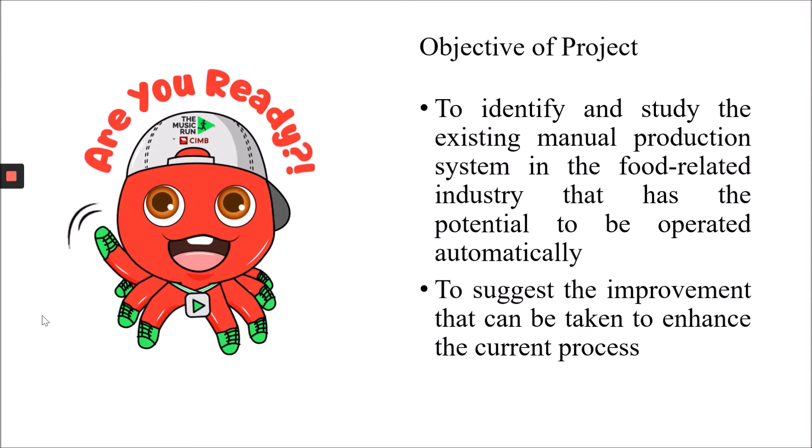First, let me talk a bit about what is automation. Automation is actually a process of automatically producing goods through the use of robots, control systems, and other appliances, with minimal direct human operation.

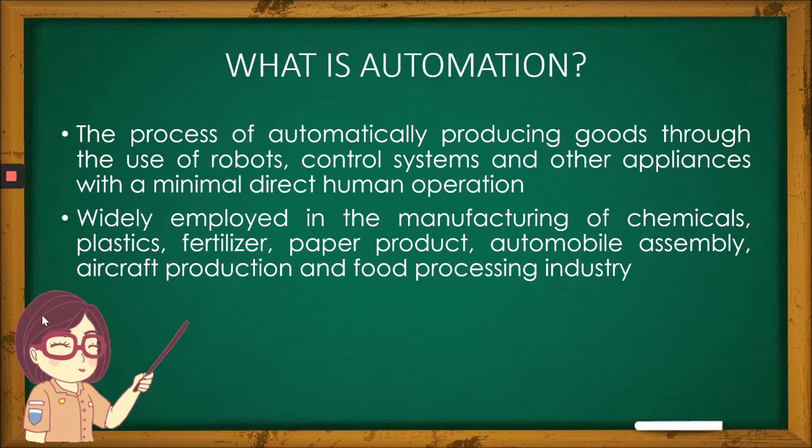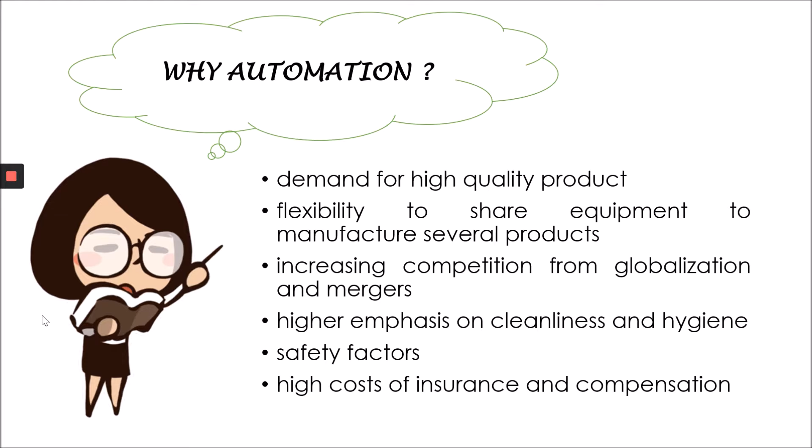It has been widely employed in the manufacture of chemicals, plastic, fertilizer, paper product, automobile assembly, aircraft production, and also food processing industry. Why do we need automation? Because there's a high demand for quality product, flexibility to share equipment to manufacture several products, increasing competition, high emphasis on cleanliness and hygiene, and also safety factors.

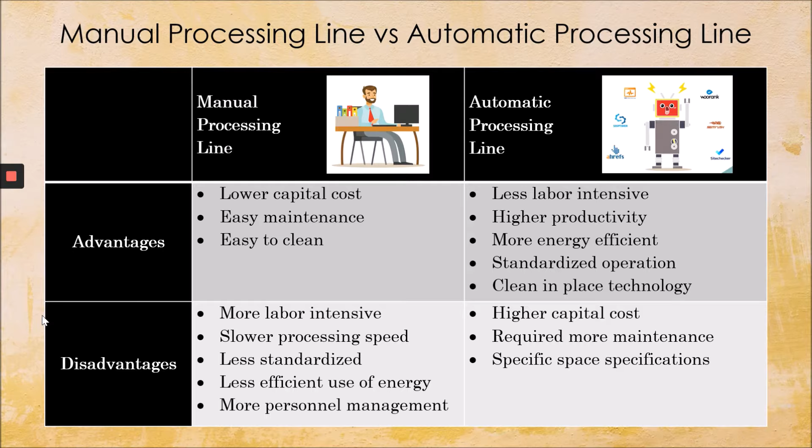The comparison between manual processing line and automatic processing line can be shown in this table, where manual processing line requires lower capital cost and is easy to maintain and clean. However, it requires more labor, and the processing speed is considerably slower and less standardized, while automatic processing line requires less labor, provides high productivity, is more efficient, more energy efficient, and standardized operations.

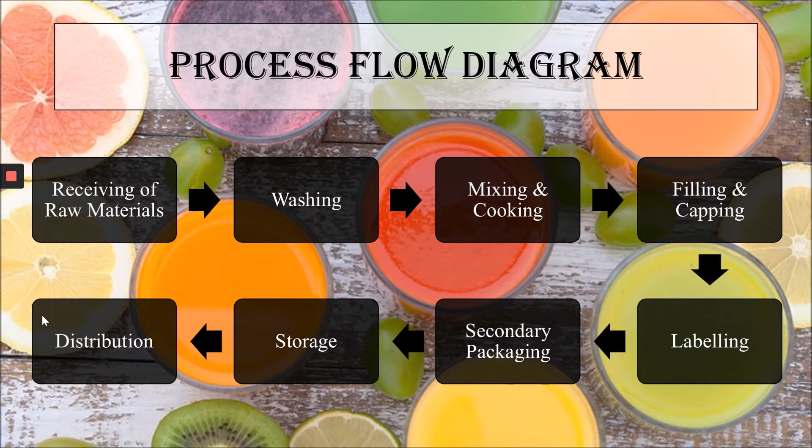Let us start with the house of quality first. House of quality is actually defined as a product planning matrix used to show how customer requirement is related to the method to achieve the requirement.

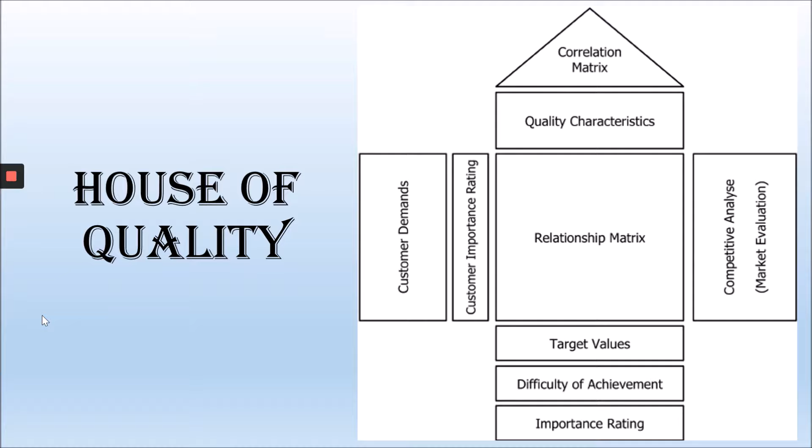In this house of quality, it consists of customer demand, quality characteristic, relationship matrix, correlation matrix, competitive analysis, and also the design targets.

In our proposed house of quality, there are six main customer demands, which are high quality product, reasonable price, variety of product choices, product appearance, tasty and nutritious product, and also long shelf life and shelf stable product.

The quality characteristics include production cost, flexibility of machine, reliability of machine, quality control, formulation or recipe of product, cooking technology, and also availability of raw material.

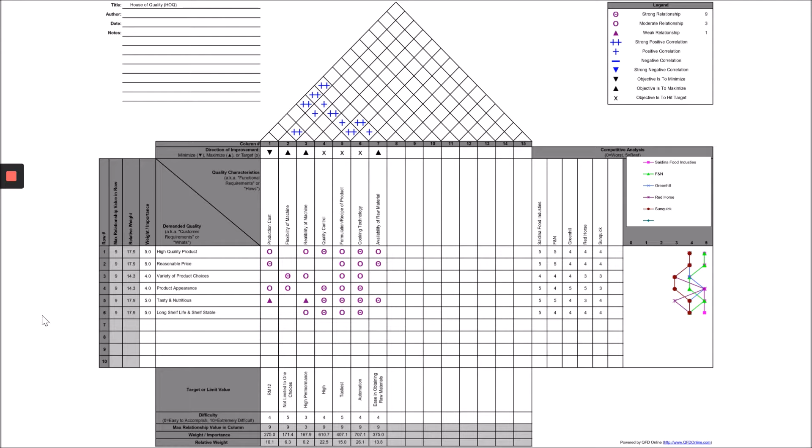From this house of quality that has been done, it shows that the highest weightage quality characteristic is the cooking technology, followed by quality control, and then followed by formulation or recipe of product.

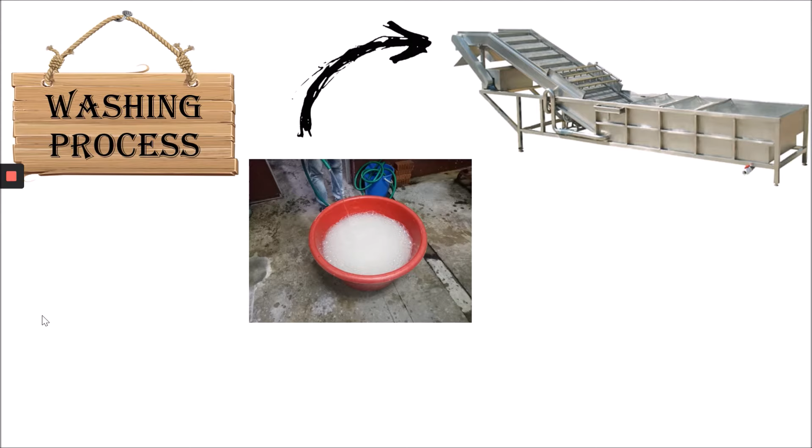Next, we will go into the section of suggestion of machines. First of all, we suggest the machine for the washing process. As we can see in the figure, they are currently using a manual washing process that requires high manpower and is time consuming. So we suggest two machines, which are the fruit bubble washing machine and also the barley washer.

The barley washer uses the principle of density to discharge out barley and impurity into different pots. The parameters used are the dry wet degree of barley, soft and hard quality, and also the particle size. The advantages of using this washer are that it reduces water consumption, reduces labor work, and provides safe raw materials for further processing.

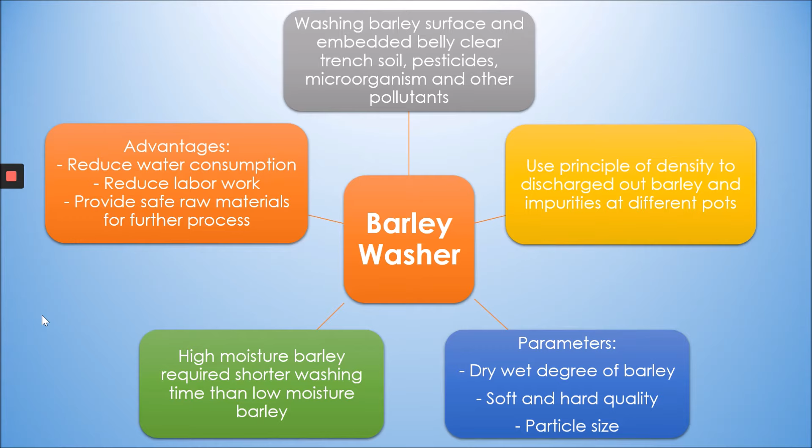Then we look into the fruit bubble washing machine. This machine adopts high pressure water and bubbles to clean the food. It is equipped with two special features, which are an ultrasonic water meter to determine water velocity and temperature, and also a discharge conveyor to transport the washed raw materials to the next devices.

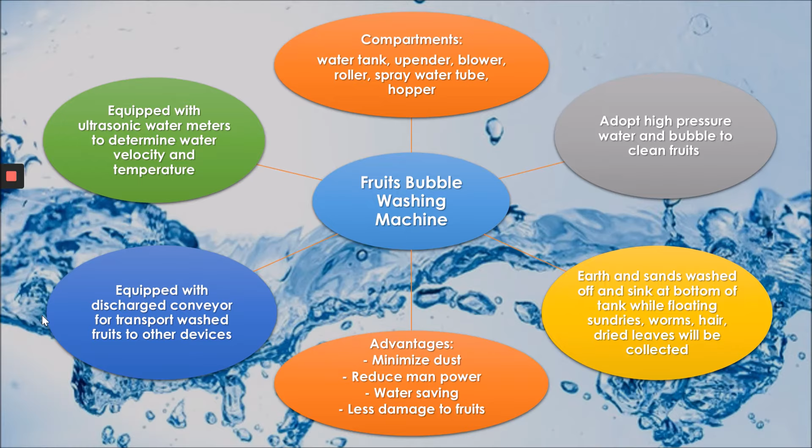The advantages of using this machine are that it minimizes dust, reduces manpower, reduces water consumption, and causes less damage to fruits. Next is the mixing and cooking process.

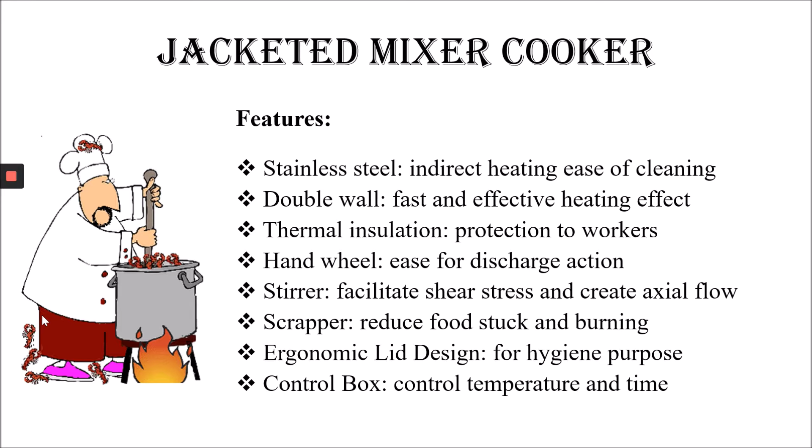So we propose the jacketed mixer cooker that has a feature of stainless steel for indirect heating, for cleaning, double wall for fast and effective heating, insulation for protection to workers, stirrer to facilitate shear stress and create axial flow, scraper to reduce food stuck and food burning, ergonomic lid design for hygiene purpose, and also control box for control temperature and cooking time.

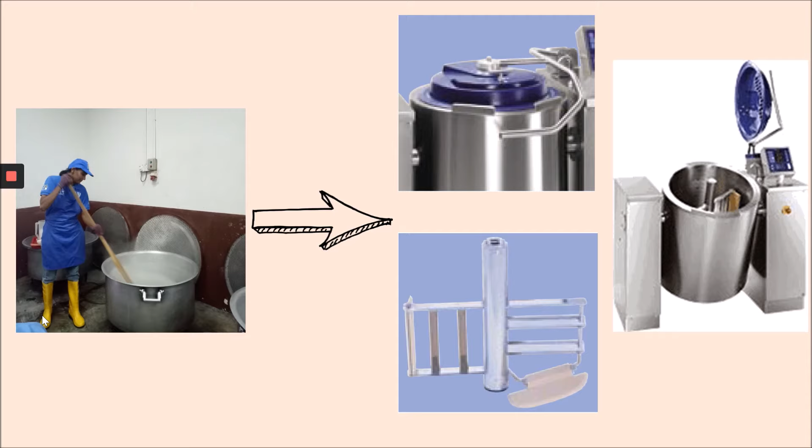In this figure, we can see that by the current manual cooking process, there's a possibility of food burning and also risk of safety. So we propose the jacketed mixer cooker with ergonomically designed and also stirrer with scraper for more effective and quality cooking process. Then there's electric parts associated in this machine.

The two main most important electrical parts are the programmable logic controller, PLC, which is a device used with programmable memory to store instructions and implement a specific function, and to control the execution of machines. And also HMI, human machine interface, used for data entry, editing in recipe, and storing of data, which means we can select the recipe for the desired product with this feature.

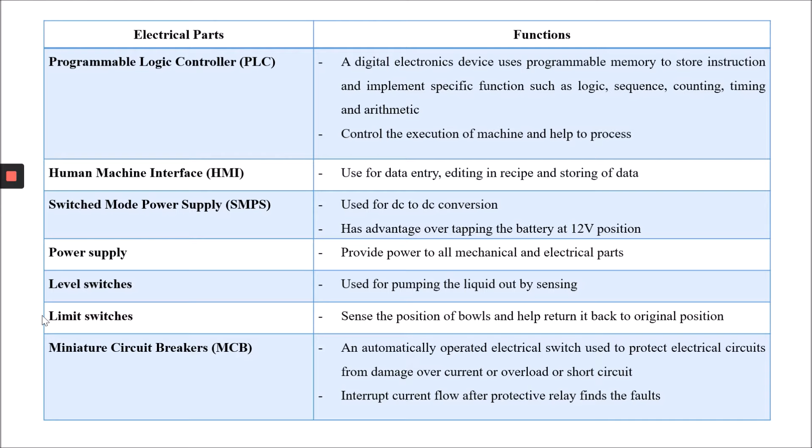Next, we also propose the automated filling and capping machine for the filling and capping operation. In this machine, there are three main operations: bottle washing and rinsing, followed by product filling, and lastly capping.

In the washing and rinsing station, it will first wash the bottle, then invert the bottles to remove the water residue, and after that rotate back to the original position. At the filling station, it consists of multiple filling nozzles and a dual track conveyor to ensure there's no interference in the filling process. Lastly, the capping process has three operations: cap placing, cap pressing, and finally cap screwing.

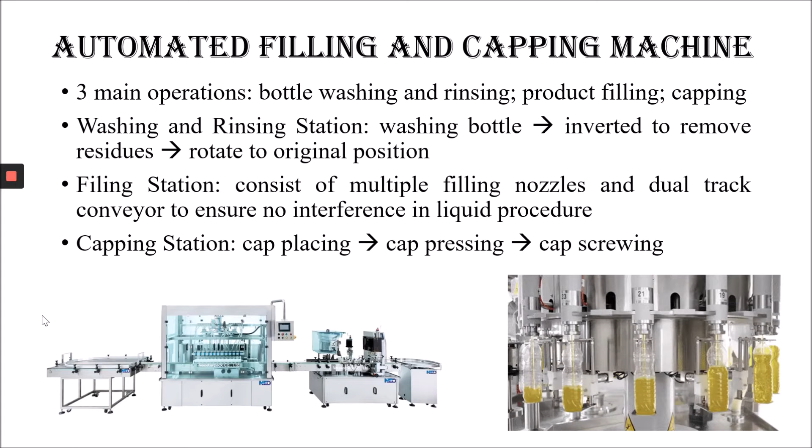The filling process is carried out by first, the sensor detecting the presence of bottles at the input, so the conveyor motor will switch on to move the bottles forward, and the PLC will receive the signal and output to switch on the pump for the filling operation.

At the filling operation in the process tank, there's LLS and HLS, the low level sensor and high level sensor, used to allow or stop the flow of product from the cooking to filling station. The filling will take place based on the desired volume that has been fed into the PLC system along with timing operation. So the pump will remain on for the preset value of the timer and switch off once the time is out.

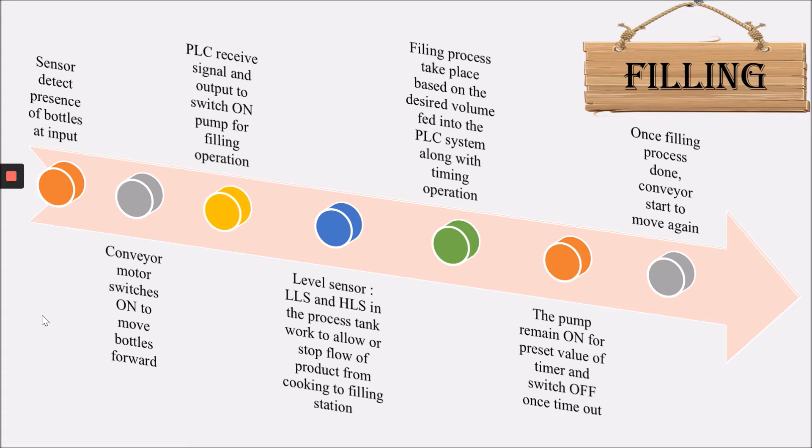After the filling process has been done, the conveyor will start to move again to the capping station. At the capping station, the sensor will first detect the presence of the filled bottles, and then the conveyor motor will switch off and three actuators will work together to cap the bottles by applying force to fit the cap onto the bottles. After the capping process has been done, the conveyor will start to move again.

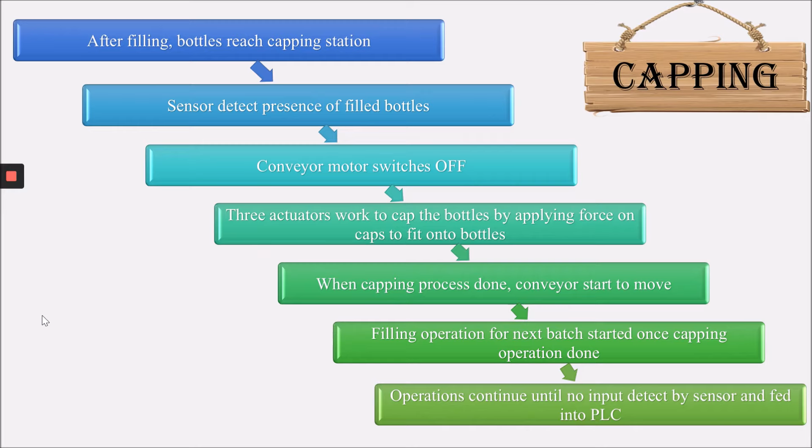Then the filling operation of the next batch will start again once the capping operation has finished, and the operation will continue until no input is detected by the sensor and fed into the PLC system.

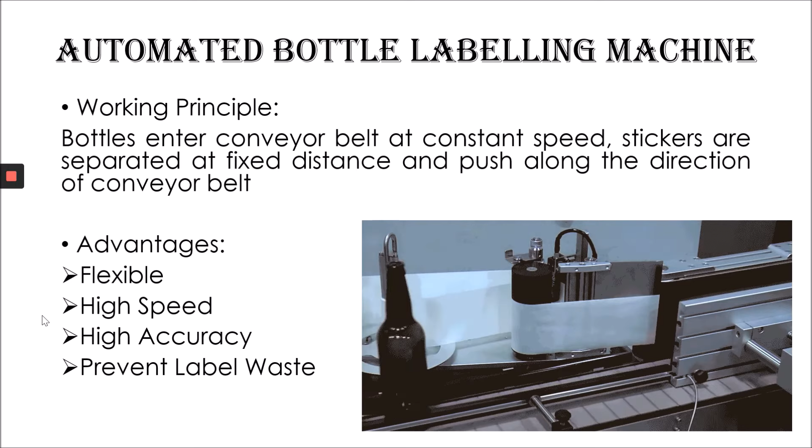Lastly is the automated labeling machine that uses the working principle where the bottles or containers enter the conveyor belt at constant speed, and the stickers are separated at a fixed distance and pushed along the direction of the conveyor belt. The advantages of using this machine are that it's flexible, high speed, high accuracy, and prevents label waste. The core principle of how this machine operates is first, the product will pass the product sensor, and the signal will send to a controller.

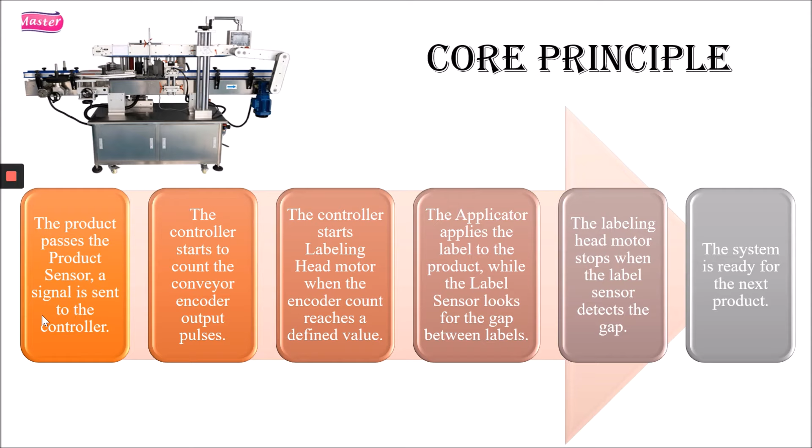The controller will count the conveyor encoder output pulses, and the controller will start the labeling head motor when the encoder count reaches a defined value, and the applicator will apply the label to the product, while the label sensor looks for the gap between the labels. The labeling head motor will stop once the label sensor detects a gap, and the system is ready again for the next product.

After the suggestion of machines section, now we are going to the plant layout section. So now we see the existing plant layout.

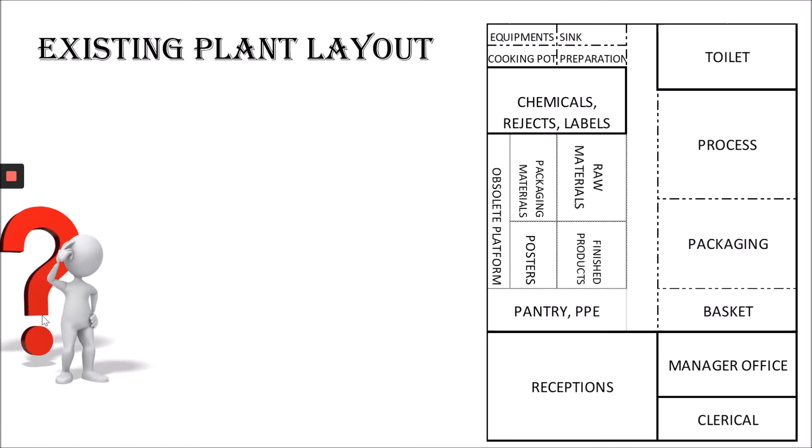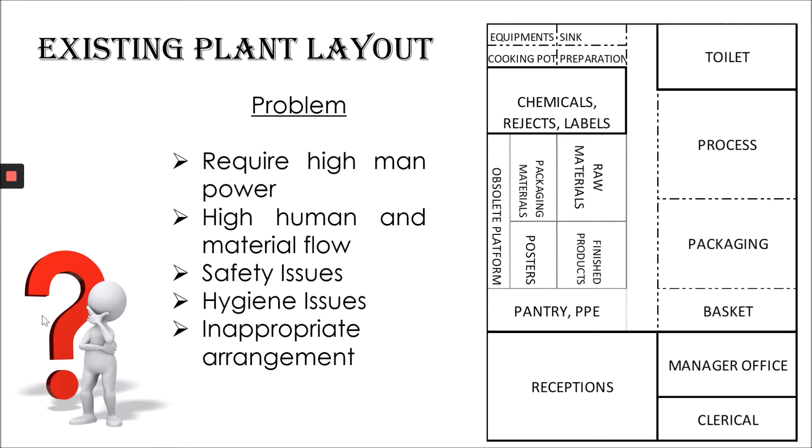It can be seen that there are several problems in the existing plant layout, which is the inappropriate arrangement that causes high human flow and material flow, and requires high manpower. There's also safety and hygiene issues.

Therefore, we suggest an improved plant layout. In this improved plant layout, first of all, we can see that there's an administration and driver holding area besides the loading bay. At the driver holding area, there's a block entrance which disallows the driver from directly entering the production site, and also the administration area for the staff and visitors working.

After that, we can see that there's separation between the storage area for raw materials and finished product. This is important to avoid cross-contamination between them, and to provide appropriate storage area, which is the storage temperature for both raw material and finished product.

Other than that, there's also a packaging material storage area, which is near to the filling and capping station and also the secondary packaging station. This is important to reduce the material flow and avoid cross-contamination, because if the packaging material is stored at the same area as the raw material, it can have the possibility of cross-contamination.

Other than that, we have also a change room and hand wash facility before entering the production site. This is important to ensure that anyone who enters the production site has been sanitized and cleaned from any contamination.

Another hand wash facility is designed in between the mixing and cooking station and the filling and capping station. This is important to prevent the cooked product from recontamination, because after the cooking process, any contamination that occurs might not be solved, and the microorganism cannot be killed again.

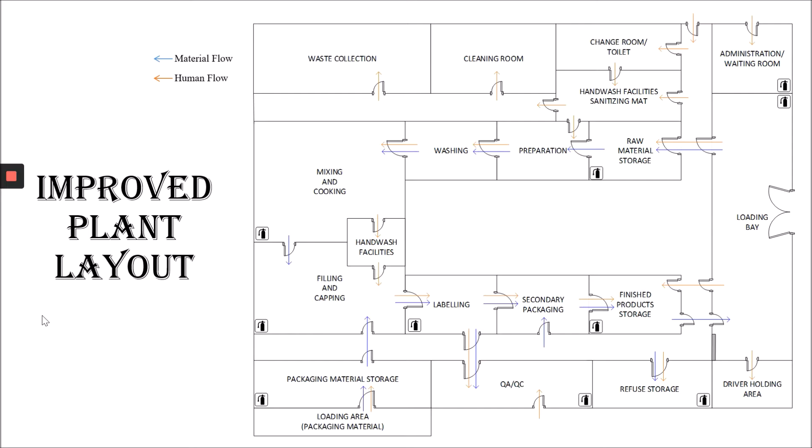So the product and our production is carried out in a one-way flow to decrease delay, for maintenance and for supervision. This is the improved production layout that has been proposed by us.

As for the proposed fully automated production system, first the raw material is loaded to the washing machine, and then conveyed after washing to the mixing and cooking station. At this stage, the fruit will mix with sugar, preservative, etc. according to the formulation, and parameters such as cooking temperature and time will be set here.

After the product has been cooked, it is in liquid form, so it will then be transferred by a piping system to the feeder tank of the filling machine. Bottles or containers will also transfer through a conveying system for the filling operations. Then sensors and the PLC system will work together at the desired parameter.

After that, the product will be conveyed to the labeling station, and inspection will be carried out here after labeling with the aid of sensors to detect if any defect product is found. It will be rejected from conveying to the secondary packaging. There will also be a metal detector operated here to ensure that the product is free from metal components.

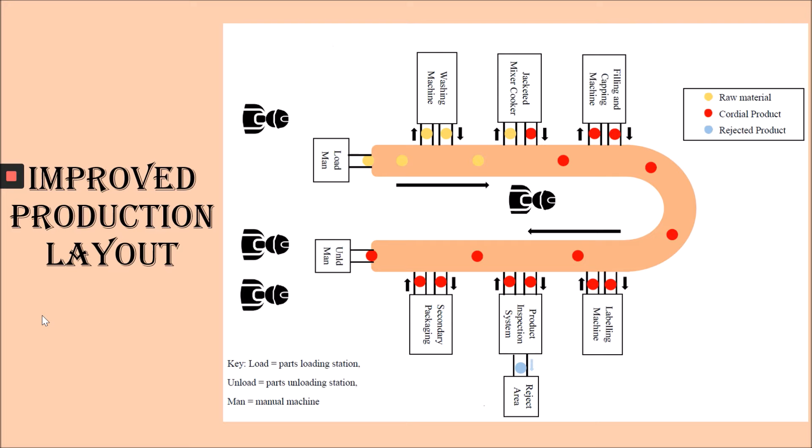After that, when these two criteria are met, it will enter the stretch wrapping system and finally be palletized and stored as the product. The whole system of the production is controlled by a computer program at the central control room.

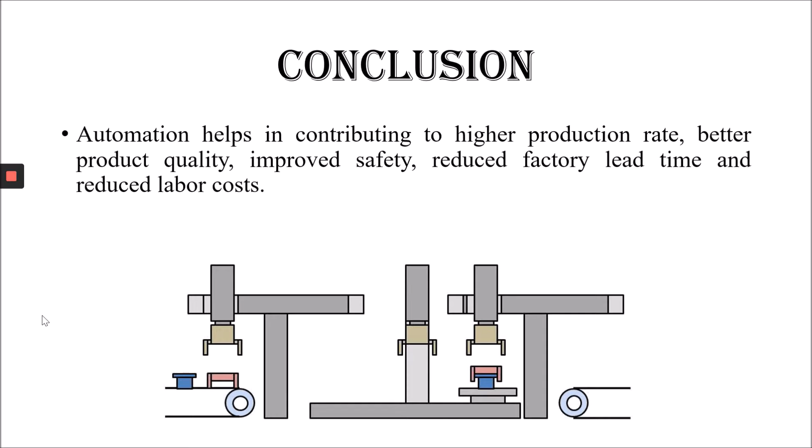So the conclusion from this project is that automation is very important, as it helps contribute to a higher production rate. It provides better product quality, improved safety, reduced factory lead time, and reduced labor costs. Yeah, so that's all from me in this project.